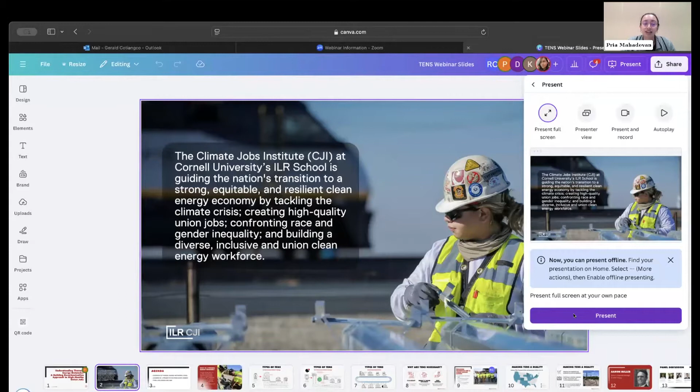So as part of that, today we are discussing thermal energy networks, or TENs, and the role that these systems can play in achieving all of those core elements of our mission. So just to set us up a little bit, CJI has been interested in researching thermal energy networks because of both their ability to achieve significant reductions in climate warming greenhouse gas emissions, as well as the potential to transition and grow union construction jobs and careers at scale.

We know that we must address the building sector in order to address climate change. When accounting for the electricity that buildings pull from the grid, buildings are responsible for the largest share of greenhouse gas emissions. And that's true not just here in New York, where they comprise 43% of all of our emissions, so that's almost 50%, but also nationally, where buildings make up 31% of all emissions, so close to a third.

And the situation is especially dire where I am here in New York City, where our buildings are responsible for 2/3 of the emissions in the entire city. And rather than bending the curve and reducing emissions, these numbers have only grown since 1990. So put simply, it's clear to us here at CJI that effectively tackling climate change means effectively tackling building decarbonization.

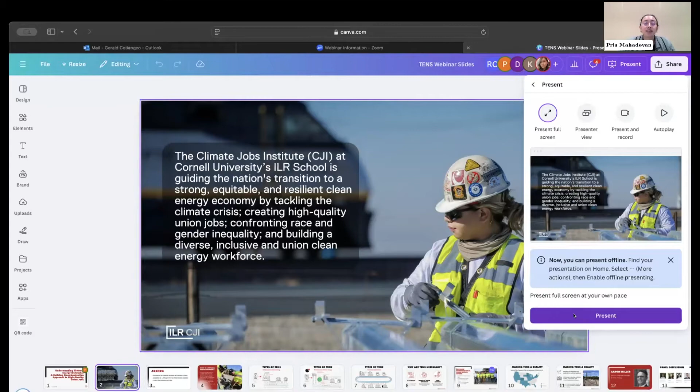However, so far we are not decarbonizing our buildings on pace with our decarbonization targets, which call for a 65% emissions reduction by 2035 and 90% by 2050. In fact, if building decarbonization were to continue at its current rate, it could take 200 years or more to fully address building emissions. That's partly because so far we have taken a building by building approach to building decarbonization, and that approach is not only expensive, but often locks out union contractors from accessing that critical work. So from both a climate and labor perspective, we know that a new approach is sorely needed.

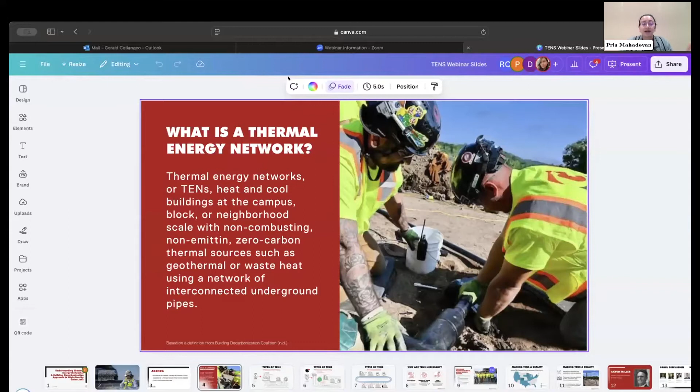So enter thermal energy networks. Thermal energy networks, by contrast, can not only scale building decarbonization across multiple buildings at once, but also require the existing skills of our building trades union workforce and can harness the network that utilities have already built. So that's just a little bit of setup. In today's webinar and panel discussion, we're going to dig into both the opportunities that TENs can unlock for our union workforce, as well as possible pathways to scale these systems.

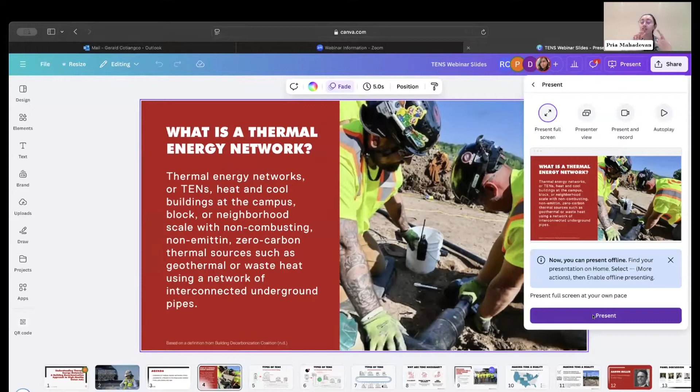So if you head over to our agenda slide, I'm not sure if the slides are showing up yet, but just to talk us through our agenda for today, first, my colleague Reyna Cohen will walk us through a brief presentation on thermal energy networks, including an overview of this technology, why TENs are necessary, and pathways to making TENs a reality. Then we will hear a brief presentation from Aaron Miller, who is the Eastern Regional Manager at SHARC Energy, about one particular type of thermal energy network that harnesses the power of wastewater for energy. And then finally, we'll jump into our panel discussion on thermal energy networks, followed by an audience Q&A session.

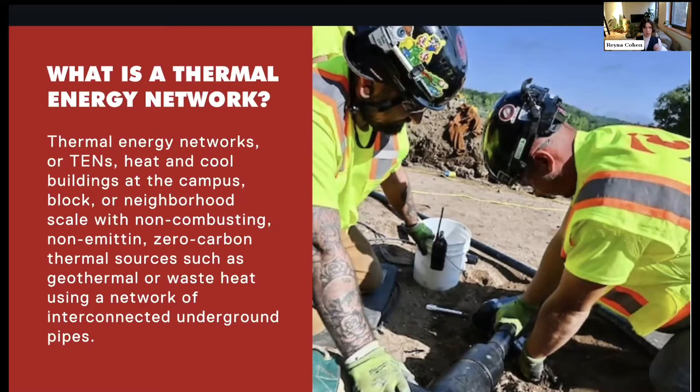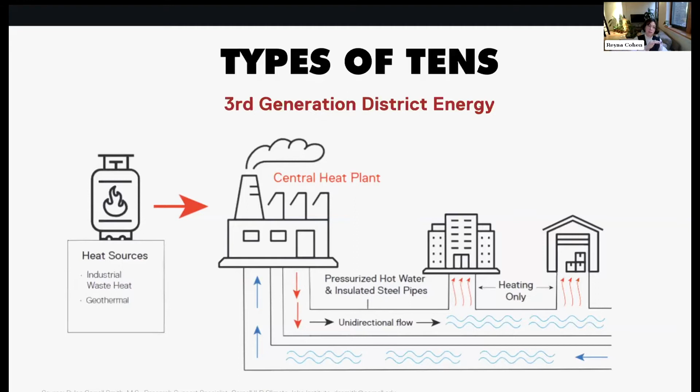Here you can see that this generation uses one singular centralized heat plant, which you can see on the middle left of the slide, to heat and cool pressurized water to over 100 degrees Celsius, which is 212 degrees Fahrenheit. And this superheated water carries that thermal energy, that heat, throughout the system of underground pipes and eventually to your building. Another key distinction of this generation is that the system is unidirectional, which means hot water flows from that central heat plant away into your building, and then the remaining cool water flows back to the plant to be heated once more. Next slide.

Another key feature of newer generations is that the pressurized water that flows through the pipes is heated to a much lower temperature, about 30 to 70 degrees Celsius or 86 to 158 degrees Fahrenheit. This means an overall more efficient system because you're losing less heat as the water flows through.

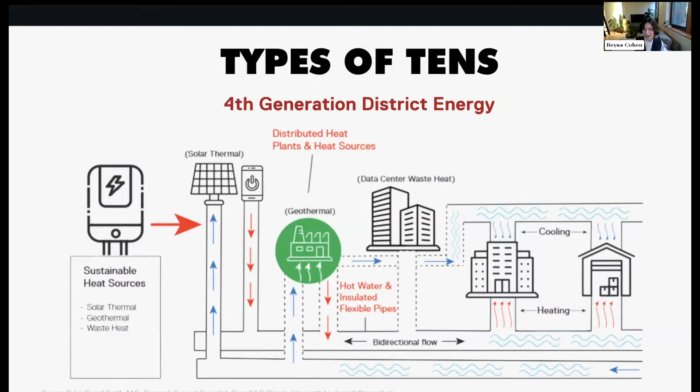These systems, because of this very specific design, are incredibly efficient. Unlike the district energy technologies that we just spoke about, these systems use ambient temperature water throughout with heat pumps for each individual building that can then control the thermal regulation of that singular building, allowing for that water to be heated or cooled with relative ease depending on the building's needs.

And something that is really amazing about a network geothermal system is that the more buildings that are integrated into the system, connected to this network of pipes, the more efficient that network becomes. This is because, thinking back to those concepts of circularity and heat generation from a building returning into the system, each building that gets connected to a network geothermal system has different thermal energy demands and may even produce excess heat. And because of this heat pump connection, that heat can get put back into the system.

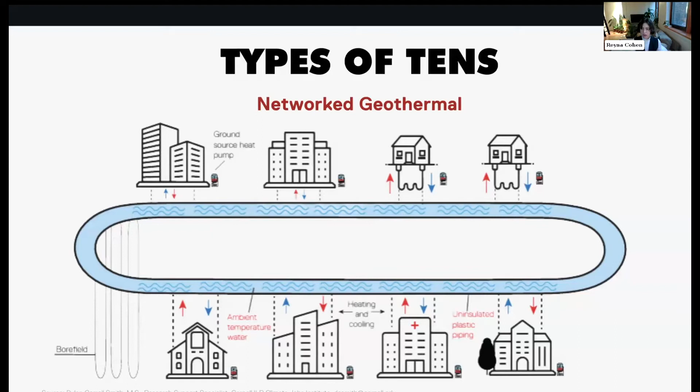And again, this is a newer technology, but we do have examples of it across the US. Particularly, I want to highlight the Whisper Valley neighborhood development in Manor, Texas, which connects 237 homes and has plans to expand much beyond that. And again, we do see this on college campuses, such as at Colorado Mesa University in Grand Junction, Colorado. Next slide.

So as we heard from Pria, we know that we cannot solve the climate crisis without rapidly reducing emissions from buildings. And we know that our current model of building decarbonization just isn't working to create that rapid reduction, in part because of the sheer scale of the problem and its cost. And this is really why TENs are so necessary. First and foremost, TENs are designed to decarbonize buildings at scale. They are inherently a scale technology by connecting a group of buildings and reducing emissions from them all at once.

Specific models or ways of deploying TENs can also help get at this issue of scale. For instance, this newer model, utility thermal energy networks, or UTENs, which some of you may know about, are a newer method of deploying TENs through our existing utility structures: gas utilities, electric utilities, water utilities, even municipal utilities. There are many reasons why this is a really exciting innovation, but thinking specifically on scale, using existing utility structures such as their access to the right of way and their existing in-house skilled union workforce are really key to driving that scale.

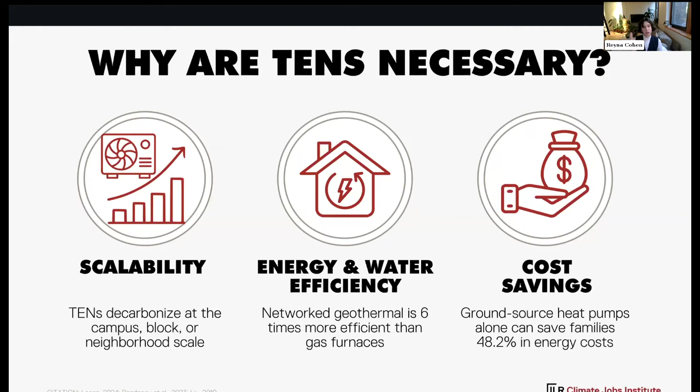Next slide. Now, I know this is the thing that most of us are extremely excited to talk about today, so I won't get into too much detail, but one of the most powerful aspects of TENs is how transformative they are when we consider building an equitable, green, union economy. In fact, one of the reasons why we did this report at CJI is because of just how crucial we believe TENs will be in creating green union career pathways in a carbon-free future.

Part of this power is in, again, that scaled nature of TENs. Scaling the work of building decarbonization from single building to single building without any rhyme or reason, dependent on voluntary action from individual building owners, just doesn't create the same scale of work as addressing whole neighborhoods of buildings at once. And that inherent scaling of the project means scaling the job creation potential. And beyond that, the scaled nature of the work will help address fears that Pria touched on of locking union contractors out of the residential sector in a green transformation.

More work in bigger projects means more union contractors might be able and interested in taking on the work, creating the potential for an ecosystem of high road, highly paid union jobs with benefits in the residential sector to take the place of existing low road jobs.

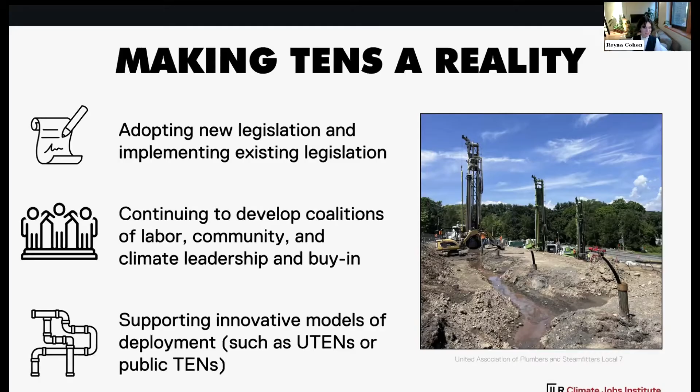Thank you so much, Reyna, for setting us up on what TENS are and also why they're so important and exciting. Really excited to dig into this more with our panel in just a moment. But first, I would like to introduce Aaron Miller. Aaron is the Eastern Regional Manager at SHARC Energy. He is a seasoned professional with extensive experience working on both sides of the energy meter and has spent the last decade focused on deploying deep energy efficiency retrofits in multifamily, residential, commercial, and industrial buildings across the US and Canada. At SHARC, Aaron supports the development of thermal energy networks that utilize wastewater to create circular energy systems for buildings across North America. And he was kind enough to make some time to provide a deeper dive on this particular type of system. So Aaron, thank you so much for joining us today. I'll hand it off to you.

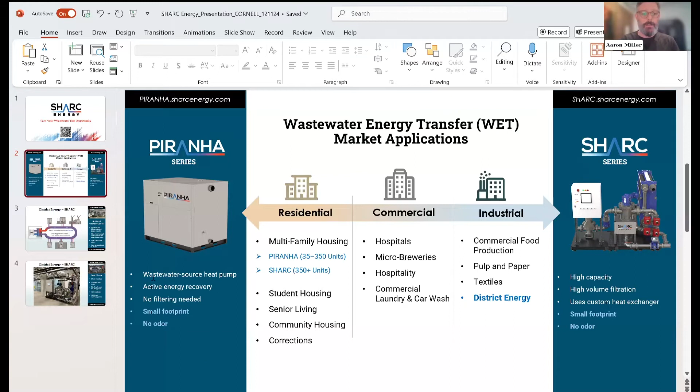And I'm going to focus primarily on 2 district systems that we have operational right now in North America. The first one's in the outskirts of Denver. This is an old rodeo stockyard that has been repurposed into a mixed-use campus. Roughly about 1 million square feet of building is currently operational on this campus.

We're using sanitary from downtown Denver, which passes in 2 giant pipes that go underground, past this rodeo stockyard. We side stream a portion of that into an underground cistern, which acts as our thermal energy battery for the system. And we run that through 2 SHARCs. And you can see on the top right-hand corner is a picture of the SHARC 880s in this very, very large barn that's designed for future capacity, getting to the point of scalability and the phased approach.

We started out with 2 SHARC 880s, you can see, providing almost 4 megawatts of thermal energy only from wastewater. The rule of thumb is 1 million gallons a day of wastewater equals 1 megawatt of thermal energy. It's incredible what you can do with just the sanitary that's gravity flowing past the property.

So again, one of the keys here is because we have a mixed use campus, you've got some buildings that are doing 100% refrigeration, rejecting all that energy into the loop. You've got some housing that's doing heating and cooling simultaneously. There's an aquatic and equestrian center that's doing mostly heating. So in shoulder seasons, when you don't have really extreme temperatures, just the buildings themselves pushing and pulling energy out of the loop, they support the loop almost completely.

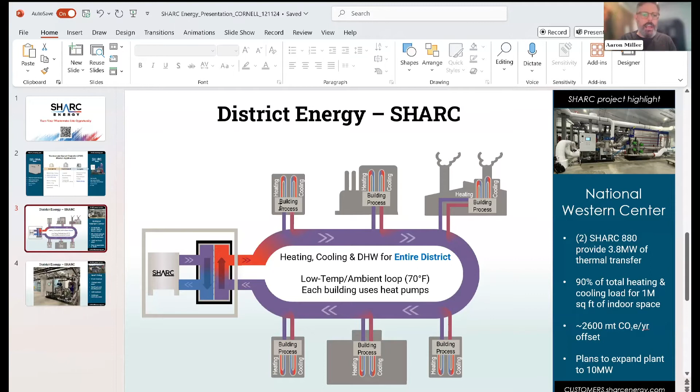And then the other system that I wanted to highlight today was from Lelum, which is outside of Vancouver. I know there was a large contingency of people from New York that just came out to visit it, and I really hope that I can bring more people out to Denver and to Vancouver. And quite frankly, we just launched our first SHARC and PIRANHA plants in Brooklyn at the Lafayette revitalization. So there's networked geo plus wastewater energy transfer in action right now in Brooklyn, and once we get the systems fully commissioned, happy to bring people by and show them.

So again, mixed use buildings, pushing and pulling energy in and out of the system, in and of itself supports the TEN. The wastewater is there to act as a temper, if you will. And the great thing is, when you tie geo in, we did an analysis for that Brooklyn property to pick up the entire thermal load of a very large low income housing complex. We were originally going to need 125 boreholes.

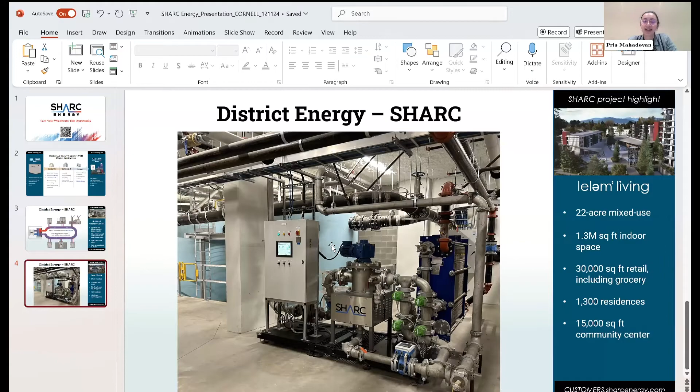This is super exciting. And thank you so much for being here, Erin, and for sharing that presentation on what wastewater powered TENs look like on specific projects. It's really cool. And like you said, it's a whole village of technology within this big umbrella of TENs that we're talking about. So Erin is going to rejoin us for the Q&A session, but now I'd like to introduce our panel. I've already introduced Reyna. Reyna's going to stick around and share more about her research insights. So Reyna, welcome back.

In addition, we are very lucky to have 4 other guests joining us today. So first, John Murphy is an international representative of the United Association of Journeymen and Apprentices of the Plumbing and Pipe Fitting Industry, or UA, which involves representing 13 local unions in New York with more than 2,400 members. John joined the union in 1984 as an apprentice and is also a 4th-generation union plumber in New York City. Previously, John held the positions of business agent, financial secretary, treasurer, and is the former business manager for the Plumbers Union Local 1. And John has been an advocate of TENs for years. So John, thank you so much for joining us.

Thank you, Pria. Just one slight correction. We have over 24,000 members in New York State. That is my bad. You are totally right. I read that incorrectly. 24,000 members in New York. Thank you for that correction.

Lisa Dix leads the New York team at the Building Decarbonization Coalition, or BDC. There, she designs and drives comprehensive stakeholder-led campaigns and policy efforts to decarbonize New York at a neighborhood scale. Her work has led to significant policy breakthroughs across the nation, including many on TENs. So Lisa, it's great to have you with us today.